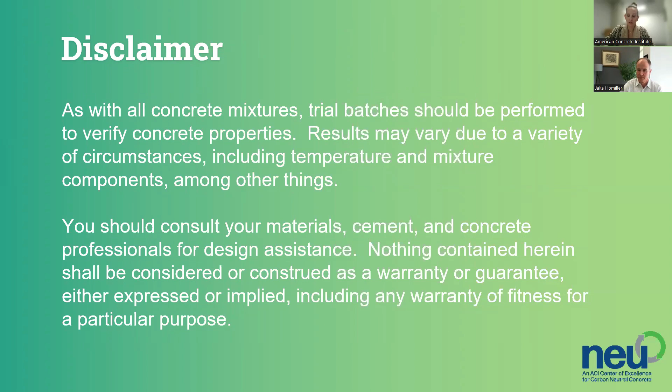It looks like approximately 83% of you answered yes to the first question, which is, do you believe that there is a willingness in the market to pay a premium for low carbon concrete? And 83% said yes. The second question, do you expect projects you are involved with in 2025 and 26 to require the use of low carbon concrete materials? Again, high number, 73% said yes.

And finally, do you think the market will prefer low carbon concrete solutions that have obtained validation or verification of environmental claims? Okay, and this one is a landslide. 100% of you said yes. Okay, thank you so much.

We appreciate your feedback. Okay, now I'd like to introduce our speaker, Jacob Homiller. Jacob is the CEO of CarbiCrete, a leading company in the decarbonization of concrete. CarbiCrete's patented process for making decarbonized concrete eliminates cement-related emissions and removes carbon dioxide from the atmosphere by replacing cement with a steelmaking byproduct and mineralizing CO2 into the concrete for permanent storage.

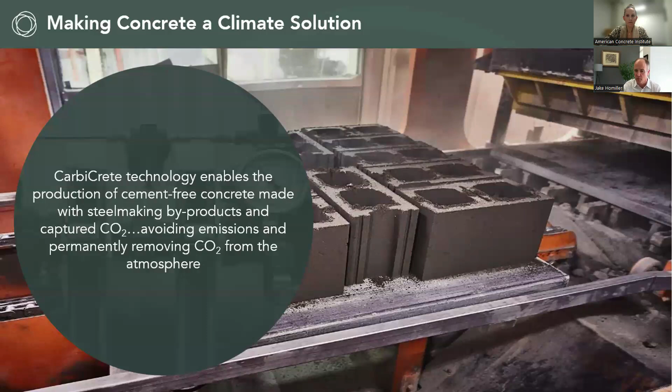Thank you. Great. Thanks for the introduction. Appreciate that. Welcome, everybody. Really excited to have a chance to talk with you about CarbiCrete and our technology. Really what we're trying to do is make concrete a climate solution. So CarbiCrete technology enables the production of cement-free concrete made with a steelmaking byproduct. And in that process, we capture CO2, permanently removing it from the atmosphere. And I think one of the things that really makes the CarbiCrete technology unique from other competing technologies out there is that we're 100% cement-free in the mix of making concrete, which is a really unique value proposition.

Probably many people are aware, but cement is a global problem. Overall, concrete is a great product. It works really well in the different applications. It's cost-effective. It's the most consumed substance on Earth after water, and the demand for concrete continues to grow. The downside of concrete is cement, which is the binder in the concrete materials. The production of cement generates about 8% of global greenhouse gas emissions. And to put that into context, the global aviation industry generates about 2 to 2.5% of global greenhouse gas emissions. So it's a very significant polluter.

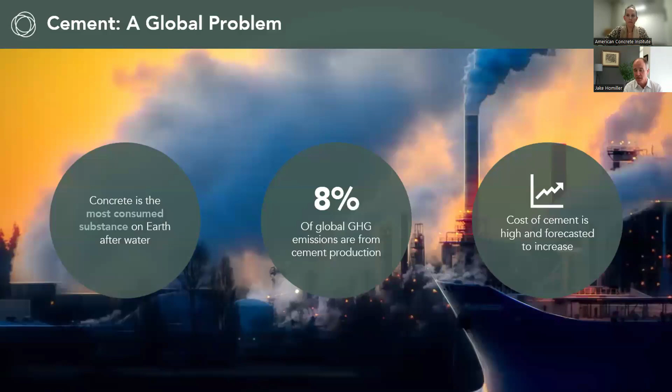The other challenge for the industry is that the cost of cement is high and has continued to increase well above inflation. The CarbiCrete solution, as I said, really solves that cement problem. And the way that we do that is we take steel slag, which is a waste product from the production of steel, typically using electric arc furnaces or basic oxygen furnaces. That material, steel slag, is often landfilled. Sometimes it has low value applications like road base

in road construction. So we take that waste product from the steel industry, we grind that into a fine powder, very similar to Portland cement. And I think one of the great things about the CarbiCrete technology is that from there, the rest of the equipment we use until the very end of the process is very standard manufacturing equipment.

So a typical cement-based concrete product goes into a curing chamber. It's time, temperature, humidity, and the material comes out partially cured, and then typically it would sit in the yard for 28 days to reach full strength or full hardness.

In our process, we use a similar chamber. Once the materials are loaded into the chamber, we shut the door, we fill the chamber with CO2, and then the CO2 mineralizes or chemically reacts with the materials that are in the steel slag to create the binder. And in that same kind of 24-hour curing time, the products come out 100% cured, so they've reached the full strength and hardness, and they're ready to go to a job site.

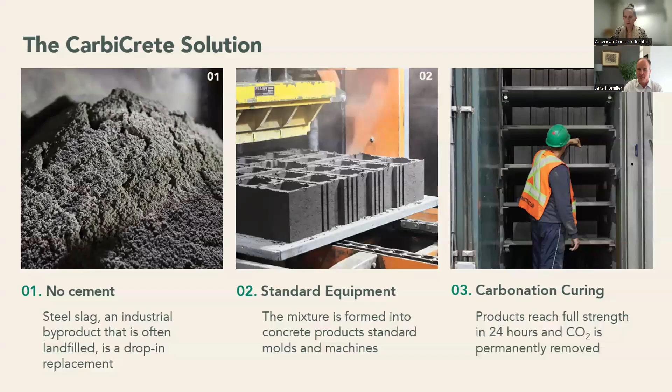So why steel slag? I think it's important to know, and probably many people are aware that granulated blast furnace slag, so iron slag, has been used in the cement and concrete industry for a very long time. We use, as I said before, steel slag that comes from electric arc furnaces. So it's fundamentally a different material than the GGBFS slag that maybe many people are familiar with. So we're finding a new purpose for that EAF steel slag.

This is a material that's readily abundant. There are hundreds of thousands of tons at many steel manufacturing sites. There's over 350 million tons of steel slag generated each year. So finding an opportunity to use that in a value-added way is a great part of the overall CarbiCrete story.

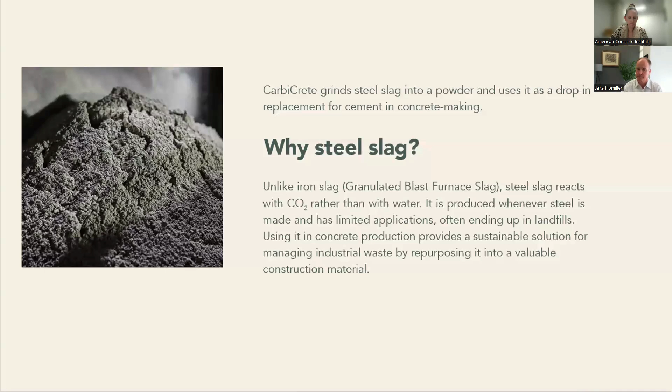So carbonation curing. So this is what's happening when we introduce CO2 in the chamber with water and the steel slag that's part of the overall mix. During our process, the CO2 becomes a solid mineral, so it's reacting with the materials that are in the steel slag to create calcium carbonates or calcium silicate hydrates. And that's fundamentally what gives the strength to the CarbiCrete products.

The CO2 that we use is biogenic CO2. Today, what we utilize in Canada is CO2 that's captured at ethanol plants, and then that's introduced into the chambers and then permanently sequestered into our materials.

Things like direct air capture or industrial point capture of CO2 are really interesting opportunities. We've done a lot of work to validate that we can cure our products with lower concentration levels of CO2. So that opens the door for both cost savings in the future and reducing the cost of the CO2 input, but also being able to improve the circularity, improve the ability to generate value for industrial waste streams of CO2, which are prevalent out in the market.

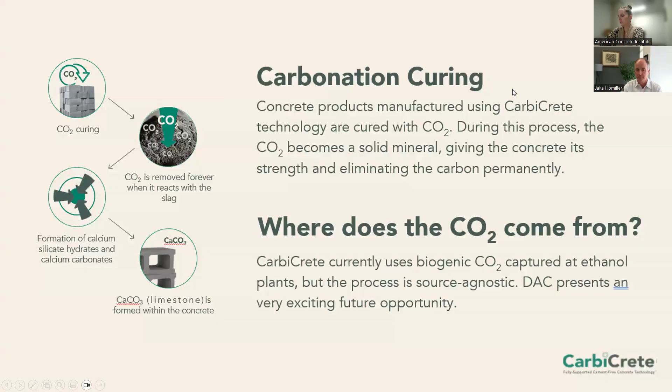So to give you a sense of the magnitude, 1 CMU, a concrete masonry unit, which is what you see there in the picture, in 1 CMU, we're avoiding 1.5 kilograms of CO2 emissions because we don't use cement. And then we're permanently sequestering about a half a kilo of CO2 into each of the blocks that you see on the page there during the curing process. So in total, we have about a 2 kilogram per CMU impact on CO2, both through reductions and removals of the CO2.

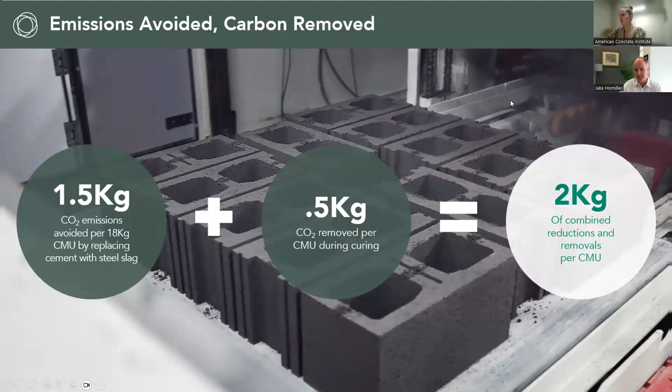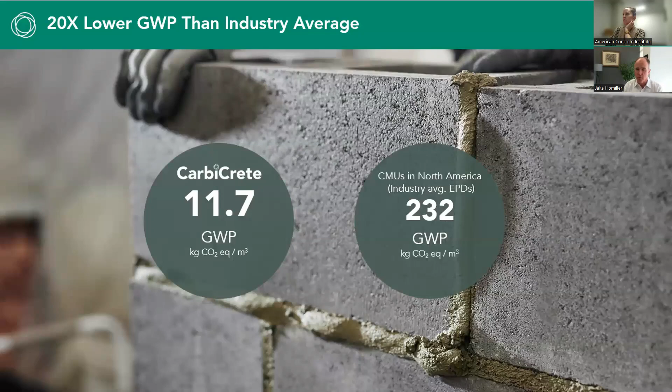To give you a frame of reference, we have a third party produced and ASTM validated EPD. But I think one of the key takeaways is if we look at the global warming potential of a CarbiCrete material, we generate about 11.7 kilograms of CO2 per cubic meter of concrete. When we compare that to the industry average in North America of 232, we're about 20 times lower in GWP than the industry average, which is really a significant impact on the CO2 attributes of concrete and makes it a much more impactful, low carbon building material for industry.

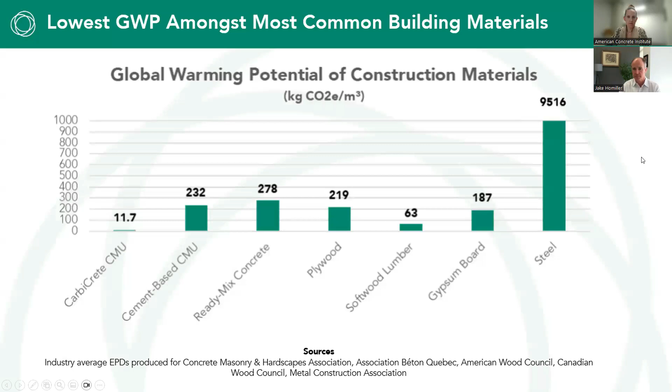As I said, we worked with Climate Earth as the validator of our life cycle assessment, looking at all of the impacts of CO2 and a number of other factors. There was a lot of work that we did with Climate Earth, and then all of the work that Climate Earth did was validated by ASTM.

So this one demonstrates the impact that our products can have for project managers, along with LEED points and things like that. It also gives us direction on things that we can do to further reduce the emissions footprint of our products, which is obviously something that's important to us and that we're working on from a development standpoint.

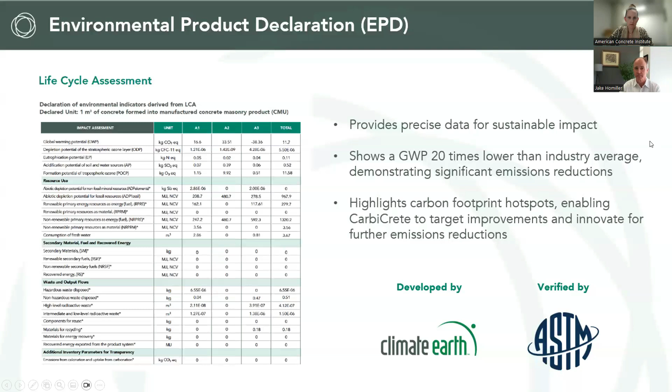Right now, we're commercializing our technology through licensing partners. So we have a licensee in Quebec that is producing products and selling those into the market here in Canada, but also into the northeast of the US. We have a licensee in Ontario where that project is being executed right now. We expect mechanical completion by the end of March and then commissioning and startup in April. So we're excited to be able to have products available for the Greater Toronto area.

We have identified a joint venture partner in the southeast of the US to co-locate a facility at a steel mill, so we have optimized slag cost and logistics, as well as licensing partners in Europe and in the United States that we're working with to finalize commercial terms and project execution.

For licensees, we offer the opportunity to generate higher margins, both through potential price premiums for decarbonized building material, but also as an offset against increasing and high cement prices, and the ability to differentiate their products for projects that have specifications for low carbon building materials. So the ability to gain market share and win new jobs. And then there's also the opportunity to generate additional revenue streams through carbon financing. We signed and announced late last year a multi-year offtake agreement with Meta for the avoidance credits that are generated from our projects in Quebec and Ontario.

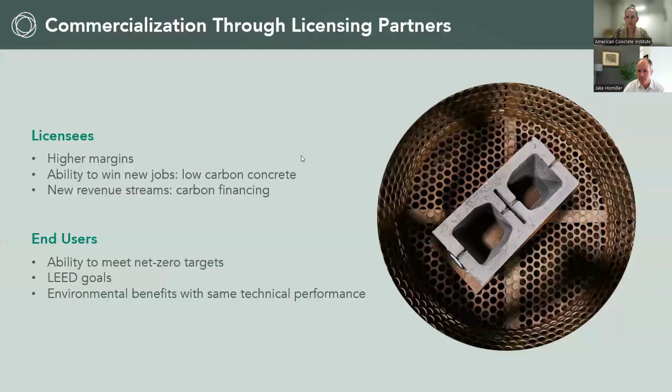Okay, I think we'll just do one more and then we'll be done. What products can be made using this process? Yeah, so we shared a picture in the presentation earlier. Maybe I'll just pop it back up. The pictures at the top, CMUs and different shapes of CMUs, that's a typical North American standard, but the standard CMU in France has a different shape. We can do that. It's just a different mold in the machine.

Really anything from a mold standpoint. The deck blocks are a more typical Canadian product for holding deck posts. Our customer just made that based on a formulation they used for a different product with our technology, and had great and very quick success with it. So all of those different paving and hardscape products are things that we're able to do.

The items in product development are listed below. Colored pavers: we continue to work on the most economic way to make colored products. And these interlocking pavers, professional pavers, are thicker, so typically there's a little bit of development work to make sure we have the formulation correct so that we get the full strength performance that we need for those thicker professional products.

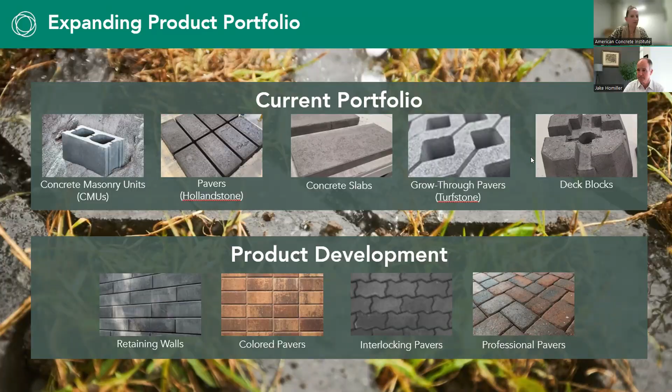Okay, it looks like one more question just popped in. Are these products lower GWP than all other masonry products available in the market today? Yeah, I covered that a little earlier, but we're about 20 times lower than the industry standard for CMUs, and an even greater factor below ready-mix concrete. We're at 11.7 versus around 230 to 270 GWP for traditional cement-based concrete. So really significant environmental impact.

And again, GWP is a measure captured in our third-party validated EPD that measures the CO2 content per cubic meter of concrete.